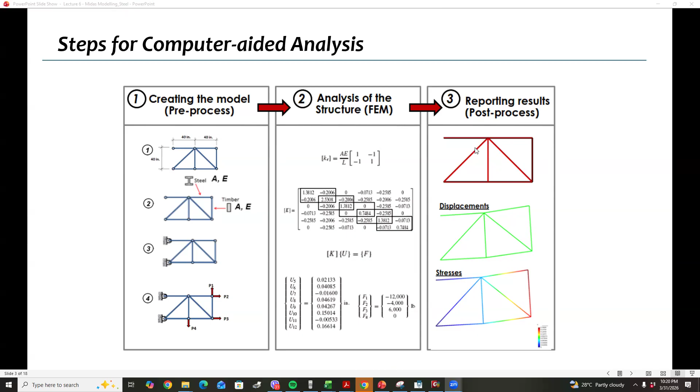For this Midas tutorial, actually I used a reinforced concrete building. However, I already translated it into a steel structure. I went through a few trials in order to convert the building from reinforced concrete into a steel structure. But later on, what we're going to model is a steel structure.

Then we go to analysis, and then these are the post-process - that's the design. Post-processing is the design.

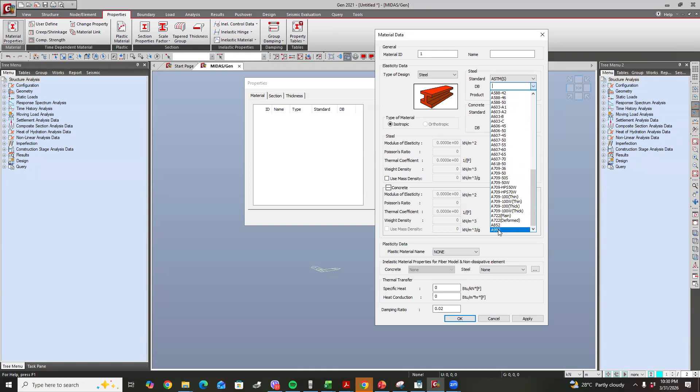Since that's standard, basically our FY is 345 for A992 steel. Click apply, and then we have the steel material. Click OK. So basically this is okay now. I've already added my material.

I will now go to my section to add a section. Basically just click add, and since we're using steel, we go to I section. For the I section, we go to our material.

I will define G1, first C1 - column 1. Let's go here, column 1, column 2. I will define the I section, the column name, let's put C1. Then if you click DB, that means standard.

If you click on this one, you pick your standard. Our standard that we are going to use is AISC 10 - US standard, which is also common in the Philippines. So you just find the standard section that we are going to define. Our standard for wide flange is, based on our assumption, W18 by 76. I'm just going to pick it here, W18 by 76.

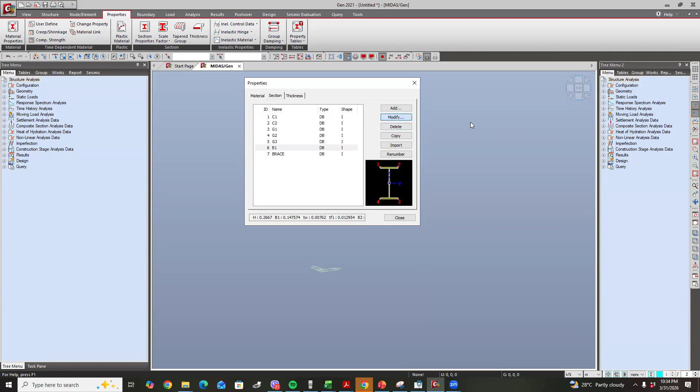So I have now all the sections: C1, C2, G1, G2, G3, and brace. If I'm going to close this - if you want, you could change or modify the section that you've already used. Let's just check: W18 by 76, modify W18 by 71, W12 by 50, W12 by 40, W12 by 53, and of course W10 by 30 and the bracing W10 by 33. Once all the sections are already okay, let's close this.

Then now what we can do is define our frame. We will now define the frame. To define a frame, let's go here to structure. Here in structure we have easy draw frame - basically it automatically draws the frame. But when we say frame, it stands vertically.

So if we click frame, we'll get a frame wizard. With this frame wizard, we could actually draw - we can use this for faster drawing, to draw our floor plan. So let's now draw our floor plan.

We have the 4 meters and then 4.5, repeating 1 through 10, 10 times. For the X dimension, I have 4 meters for the first one, then for the next one I just add the X coordinate. I will now add 4.5, and it will repeat 10 times. So add X coordinate, that's 49 meters.

Now I'm going to define the y-axis. We have here 2.5 meters, so I define 2.5 for the first one, add z coordinate, and then the other one will be 7 meters. So I'm going to define 7 meters and then z coordinate. You could check the nodes below, parang parehas naman nung ating floor plan. Basically, that is correct.

So this is our floor plan. Take note, that is only the nodes. Ibig sabihin, mga points pa lang po yan. So we have to go to edit. We have to generate the frame.

Mag-generate tayo ng frame, and at the same time our angles. Pwede na po tayo mag-generate ng frame. We could choose the material, which is steel material, and then we could choose what section we want to put in our frame, kung ano section po yung gusto nating ilagay. But basically, if you are going to choose, piliin mo yung pinakamadaming section. So the common section here is G1.

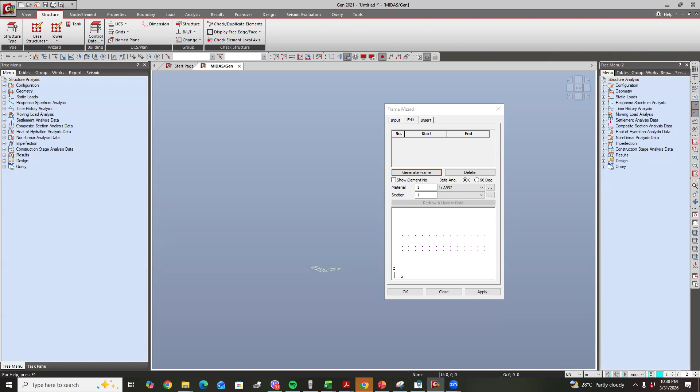Also don't forget to save your project. Basically, it will be easier for me if it will be G1, kasi nga po, that's the most common beam size. Yun yung common beam size. And then, if I want to generate frame, magkakaroon na po ako ng frame dito. Ibig sabihin, magkakaroon na ako ng section or magkakaroon na ako ng elements.

And then, if I want to insert, take note, if the insertion point will be 0, 0, 0, it means this point will be 0, 0, 0. And take note that what we are drawing is a frame, so nakatayo po yan. So, kapag dinrawing natin yung frame, nakatayo yan, like this. But what we want is we want it to be nakahiga, kasi nga, floor plan yung dinrawing natin eh. So that's a floor plan.

So we want to rotate it about the x-axis. Kung magro-rotate tayo about the x-axis, we want to change the alpha to negative 90. If we want to rotate about y-axis, babaguhin natin yung beta. If we want to rotate about z-axis, babaguhin natin yung gamma. So in this case, alpha, beta, gamma, ang gusto ko alpha. Gagawin ko siyang negative 90 para mag-rotate. And then it will now rotate, magro-rotate siya. So click apply.

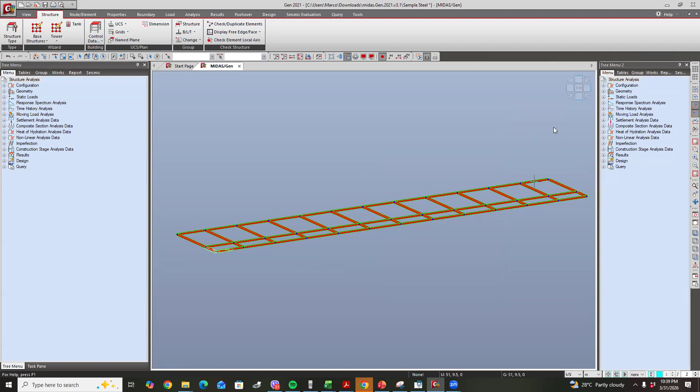So that means naka-rotate na po yung, as you can see, nakahiga na siya. So click top view. Nakahiga na po itong element ko. Nakahiga na yung floor plan natin, which is correct.

So basically, all of the element properties are now G1. Lahat ito G1. But I need to change that. Babaguhin ko po yan kasi only the row A and row B are G1. Etong row C natin, lahat ito G2. And then lahat ng vertical are G3. So I'm going to change the properties.

Baguhin ko yung properties. Para mabago po yung properties, you could go to this toolbar. Sa toolbar, how do we use this toolbar? Basically, if you want to select single, ito, select single. Ito po yung para kang pwede kang mag-select ng isa lang. Tanggalin ko muna yung 3D view para makikita nyo. Pag kinlik natin to, Control H, makikita mo, line lang yan.

Line element. So if we select this one, select like this. Take note, pag nag-select po tayo from left point to the right point, papunta dito, kung ano yung nasa loob ng box, yun yung masiselect. On the other hand, pagka nag-select tayo from down point, pataas, lahat ng dinaanan ng box, lahat ng nag-intersect sa box, masiselect. Ganun yung difference. Again, kapag from top to bottom, kung ano lang yung nasa loob, yun lang yung masiselect. Pero kapag from bottom to top, pataas, lahat ng tinamaan ng box, masiselect. That is using this one, select single.

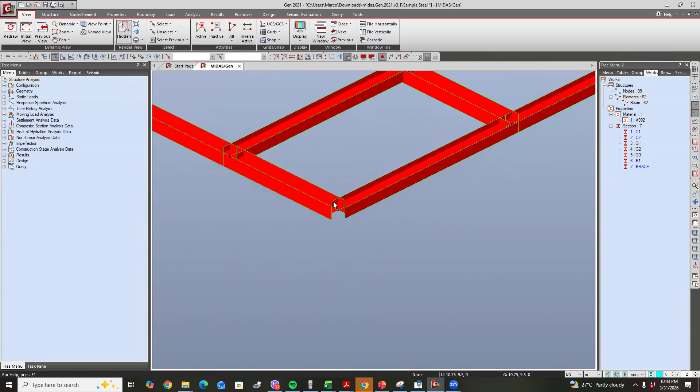Mali yung position ng aking beam, kasi yung beam ko nakahiga, naka-minor axis. Nakahiga yung beam ko. So dahil nakahiga yung beam ko, kailangan ko siyang itayo. Kailangan ko i-rotate yung local axis. So how can I rotate the local axis?

What I can do is to select all of it. Select ko lang, so naka-select na po yan lahat. Ayan, naka-red na. And then what I can do is to rotate. I will go to properties and then go to element and then change parameters.

If you click change parameters, pupunta po siya dito sa element. And then you click element local axis. Sa element local axis, babaguhin natin yung beta angle. Ibig sabihin, ito yung local axis ng ating element. I want to rotate it at 90 degrees.

Babaguhin ko siya, itatayo ko, gagawin ko siya 90. So if I click apply, naka-90 pala to kasi rotate nga pala natin kanina. Kailangan gagawin ko ngayon, gagawin ko siyang 0. Naka-90 degrees to kasi rotate natin siya kanina. So gagawin natin, i-0 natin siya. Yung beta angle naka-0, so click apply.

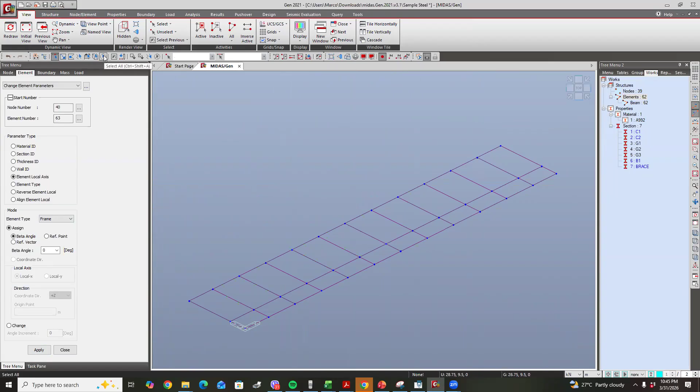Select ko muna lahat, na hindi na yata siya naka-select. So select all. For select all, pwede pala na, again, para shortcut, pwedeng gawin nyo, if you want to select all, pwede pong ito, Control-Shift-A, para ma-select all siya. Pagka naman click mo yung escape, hindi na siya ma-select all. So select all, Control-Shift-A, select all.

And then, we want to change the beta angle into 90 degrees or into 0. So click apply. You could notice na nakatayo na yung beam natin, nakatayo na. So it means tama na po yung orientation ng beam.

And then basically, it's quite confusing kasi lahat sila color red. Lahat sila color red, so dahil color red lahat, hindi mo alam kung tama ba yung na-apply mo na section, kung iba-iba ba yung section nila. So what you can do is that you could select all, Control-Shift-A ulit. Tago ko muna, Control-Shift-A. And then you go to display.

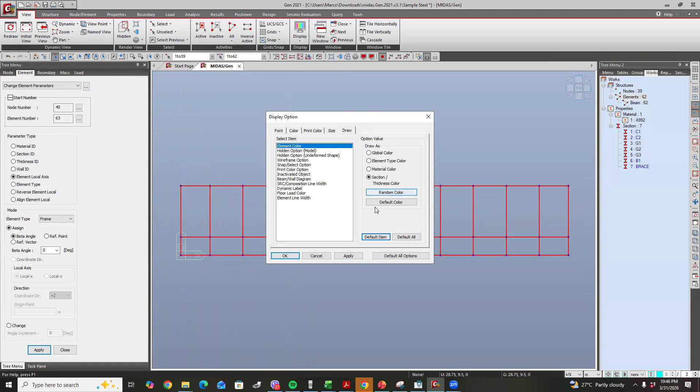Dito sa view, go to display and then display option. Sa display option, you go to draw para po mabago natin, kapag nagbabago siya ng gusto natin, iba yung kulay pag iba yung property. So you click random color and then apply. If you click the hidden property, mapapansin nyo, iba na po yung kulay kapag iba yung property, para mas madali siyang makita.

That means yung color yellow, all of them are the same property. Color orange are the same property, which is correct based on our plan. Color orange is G1.

This one is, the last part is G2. So, para mas madaling makita, at least color-coded siya. Color-coded, no? So, now, what we can do is,

Once we've drawn yung mga girders natin, maglalagay naman ako ng column. So, to draw the column, the easiest thing to do is to select, Control-Shift-A ulit. I-select natin lahat ng node. Kasi lahat po ng point na to, basically are location of the column. Lahat naman ng mga point na yan, location ng column.

So, what I can do is to extrude. Paano po siya i-extrude? Ang gagawin ko, yung node, yung point na to, gagawin ko siyang column. So, to make it a column, I will go to the node element and then you click extrude. Ang mangyayari, yung node natin magiging siyang column. What will happen will look like this, parang ganito.

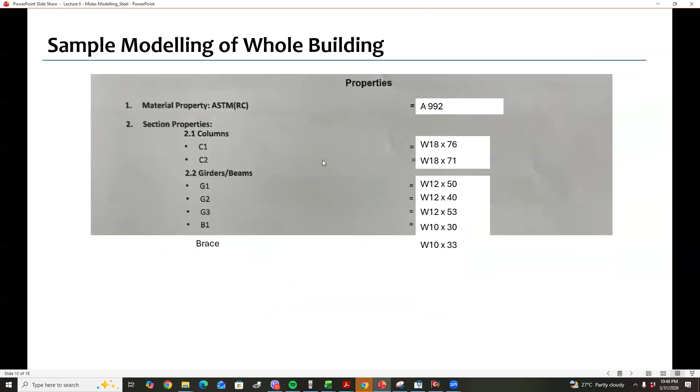So basically, kapag ka nag-start siya ng node, hahatakin mo siya pababa para maging siyang element, para maging siyang column, no? Para maging siyang column. Okay? So, basically, I will click all of this. I-click ko lahat yan, and then I click extrude. Extrude elements from node, gagawin kong line element.

As you can see in the tree menu sa left side. Node, gagawin ko siyang line element. And I want it to be reverse. Bakit gusto ko siyang naka-reverse? Kasi gusto ko, I just want na yung starting node nasa baba, yung top node nasa bottom. Kasi if hindi ko siya ni-reverse, basically, ang mangyayari, this is the start node, this is the bottom node.

So gusto ko lang nakatayo yung local axis. Para nakatayo yung local axis, para mas madali sa design, dapat nakatayo yung local axis. So, what I'm going to do is i-reverse ko siya. Reverse I and J. So, what I'm going to use is A992 and I'm going to use C1.

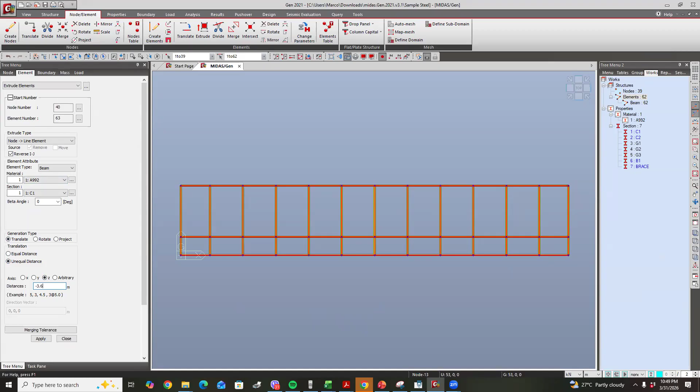And then, I'm going to extrude at an unequal distance. So, maglalagay ako ng distance at Z. At Z, I will add, it will be negative 3.6. Bakit 3.6 meter? Kasi, basically, maglalagay ako ng negative 3.6 kasi nga po, yun yung height ng ating frame or ng column, 3.6 meter. So 3.6, I click apply.

So if I go here, mapapansin nyo, na-extrude na lahat ng column ko, no? Na-extrude na lahat ng column. But, take note, lahat yan C1, which is quite wrong kasi nga, ang gusto natin, etong nasa bottom, sa bottom part, etong part na to, lahat to C2. So if I want to click only this one, etong row A, gusto ko lang makuha tong row A, pwede

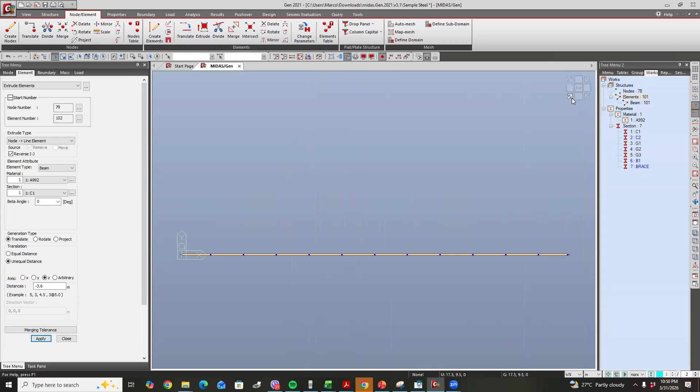ko naman, what I can do is to select only this, select ko lang muna to, yung row na yan, and then I could click to here, activate, no? So if I click F2, pag kinlik ko yung F2 or activate, ang matitira lang po yung sinelect ko. And that selection will be the first row. Sila lang, no? Kasi it will be much easier for me to just select all of this column. Select ko lahat ng column na yan and then apply C2, assign. Napalitan ko na lahat ng C2.

And then, if I click right here, Control A, if I click Control A or this one, this button right here, dito sa top, Control A, babalik na lahat ng column natin or yung previous view natin. So, basically, na-define ko na lahat ng column. At the same time, na-define ko na rin yung lahat ng section. No? Na-define ko na lahat ng section.

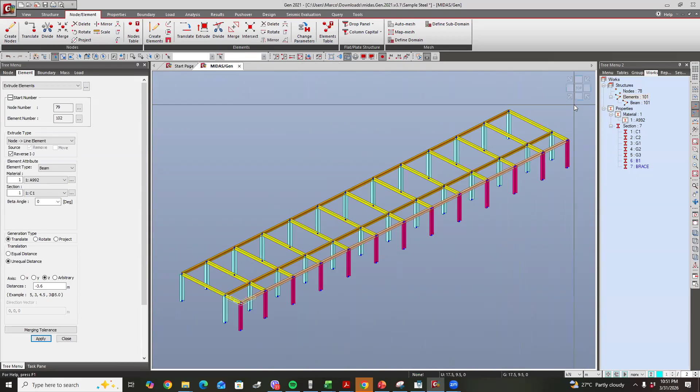So, the next thing to do is that I have here, meron ako ditong sa floor plan, I have here B1. Meron ako ditong B1, no? Meron akong B1. So what I can do is that, ang gagawin ko dito, hatiin ko muna yung B1. So yung B1 natin located at 3.4 meters.

So what I can do is to select this. Select ko yan. As well as this one kasi magkabilaan sila. And then I will have to divide the elements. I-divide ko elements. So click again to the elements dito, node and element, and then divide the elements. If you want to divide the elements at an equal distance, so an equal distance, i-divide natin sila by, anong distance yan? 3.4 meters. Click apply, an equal distance frame. So click apply. So ayan, na-divide na.

Nagkaroon na ako ng node dito. And then I can now draw. Pwede na ako mag-draw ng aking element. I'll just go to create elements and then draw. Yung element natin will be B1, A992. And then I have to just click this. Click ko lang yung node 1 and then node 2. Ayan, para mag-apply po yung B1, no?

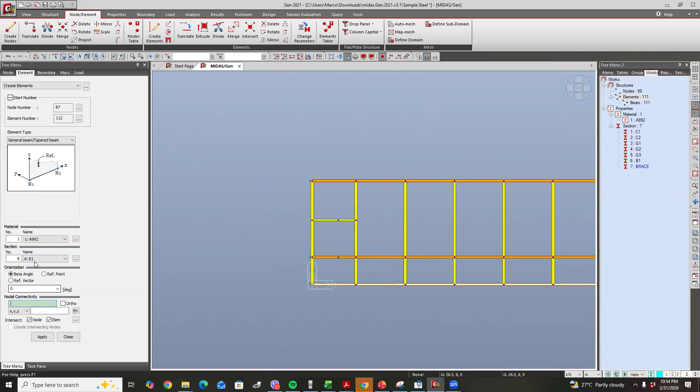So if I already have a node, I can now create the beam. Create elements, then B1. That is correct. B1, and then just create the element going upward. This one, yeah, 3.4. Also this one, you have 3.4. Okay, so our elements are now complete.

So basically, if I already have all the elements, I just want to change the color of these elements. Go to view, then display option, go to draw, and then random color, apply. So the color changes for B1, so I know the application is correct. This is B1.

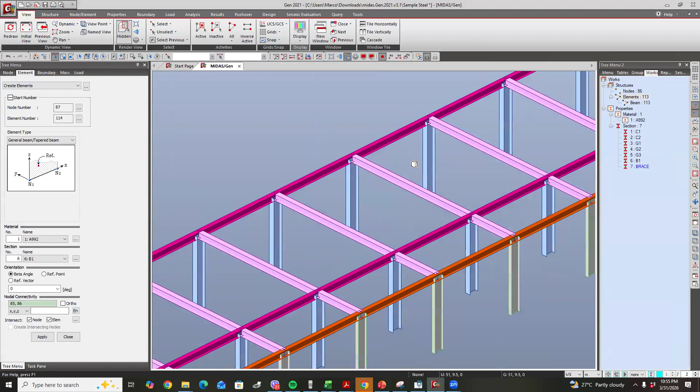Based on my design, I'm going to apply a brace, a bracing. So for me to apply the bracing, maybe I'll apply it later since it's standing here anyway. So I'll apply the bracing later.

What I can do is copy this, since it's already complete for one floor. I'll copy it up to the roof deck since it's the same. To copy up to the roof deck, click top view, select all of this, then generate a copy. We can do this through node and element, or through structure, where you can create a building generation.

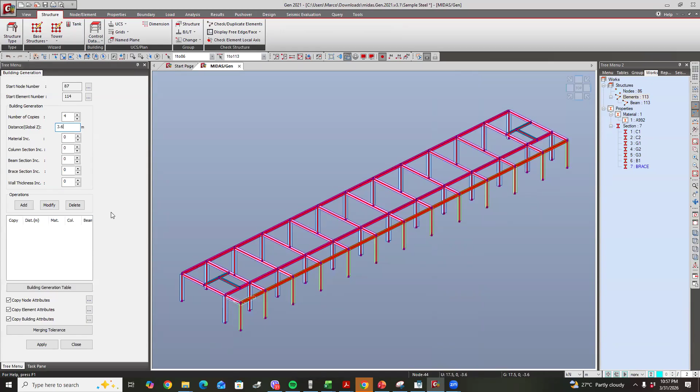In building generation, you can create a copy. How many copies? That will be 1, 2, 3, 4 copies. Not including the original, so this is first, second, third, fourth - 4 copies at a distance of 3.6 meters, global Z. Then just click add, and apply. Basically, this is now our building.

We've copied it upward. Now, if you want to create the story data - but before that, let me apply the bracing first, since we're still using a special moment resisting frame with only beam and column, it will be difficult to design, especially given the size of the building. So for this to be designed, I'll add bracing. Where will I put the bracing?

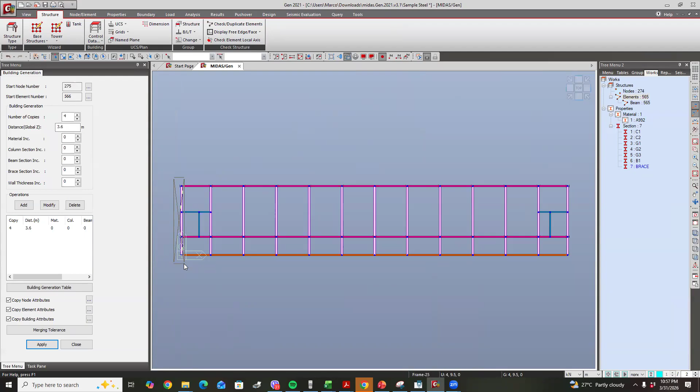So I'm going to input a brace here. I'll place the brace here because our building is quite long, and if I use only a special moment resisting frame, it won't be sufficient. That's why for these frames here, I'll add bracing.

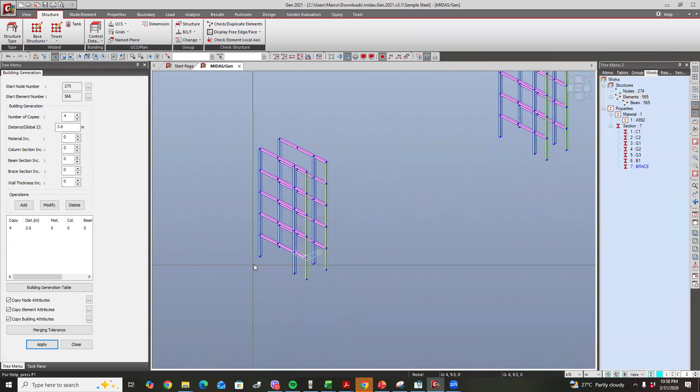Oh, I haven't yet, okay. Let's select all first - top view, all these frames here, on the first row, second floor, here, I'll add bracing to these. Click activate. These frames here, I'll add bracing to.

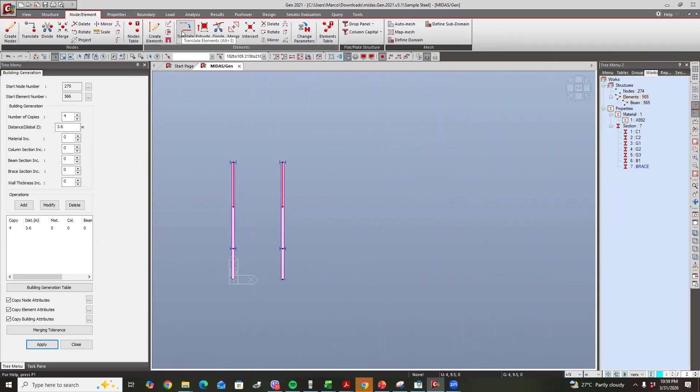Because I'll be placing bracing. So again, to add the bracing, go to properties, divide the element - go to divide, equal distance, 0.1, apply. There, the node is now placed.

At this node, that's where I'll place the bracing. Basically, if I go to the left view, this is where I'll apply the bracing. I'm just going to hide all the others. So what I'll do is select just this one frame - I'll place the bracing here first, then copy it to the left and to the right. So press F2, so this is the only thing I see now.

So I'm going to apply a brace. Create elements, and our bracing will be brace, then create the nodes. My nodes will be this one coming from the bottom, going up to this one.

Dito sa first node, kasi ito yung 3.5 meter, this one. And then, apply din ako ng brace coming from here, going to here.

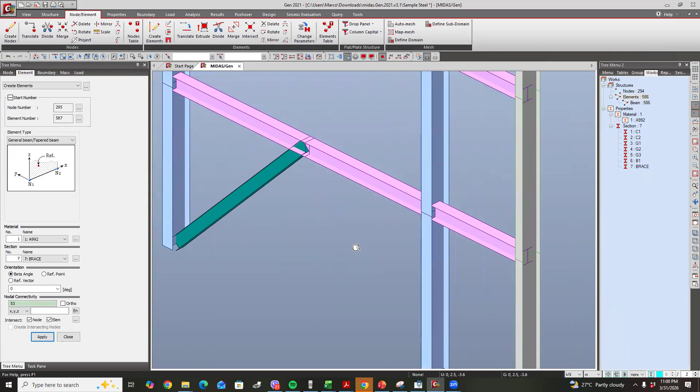Ayan, ito na po yung bracing natin. Sa brace sa baba, usually ganyan po yung itsura niyan. But for the second floor, you're going to connect the brace. So for the second floor, it will look like this.

Tanggalin ko muna yung view para hindi tayo malito. Para ganito siya, ko-connect ko siya dito. Ganun din po dito, create tayo ng brace, kung gusto nating pataas para consistent tayo sa direction ng load, pataas yung pag-assign natin.

So we start here, and then end there. Ganito yung brace natin for the second floor. For the second floor up to the third, fourth, and fifth, ganito na po dapat yung itsura ng brace. Nag-iba lang siya dito sa last floor.

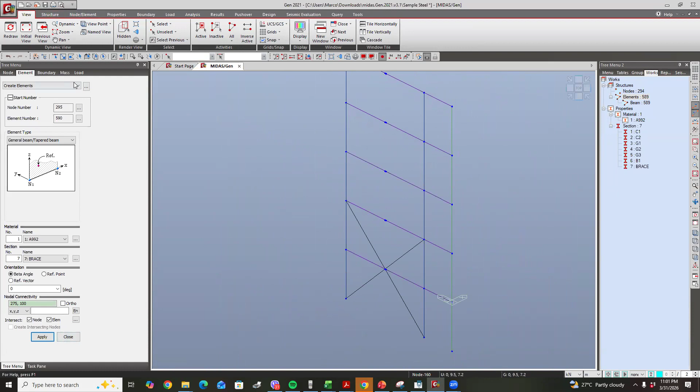So what I can do is I will copy. Ika-copy ko na lang siya, yung brace natin. So how do I copy? I'm going to select, select ko to, and then element, translate elements.

Pag nag-translate elements tayo, I'm just going to copy it at 3.6. So copy, translate, and then at an equal distance along Z, that is actually 3 at 3.6, tatlong beses at 3.6 meters. If I click apply, ayan.

So meron na akong brace, ito po yung itsura ng brace natin. If this is my bracing now, what I could do is I'm going to select all of this. Sa-select ko tong lahat na to, lahat ng brace, select natin yan.

This is now my brace. Yung brace natin, ikakopy ko dun sa second, dun sa susunod na frame. So activate all muna natin, ikakopy ko siya dito sa second frame at a distance of, anong distance nun?

At a distance of 4 meters, ikakopy ko siya at a distance of 4 meters. So copy an equal distance along x, ikakopy ko siya at 4 meters, click apply. Ayan, so basically nakopy na siya dun sa susunod na frame.

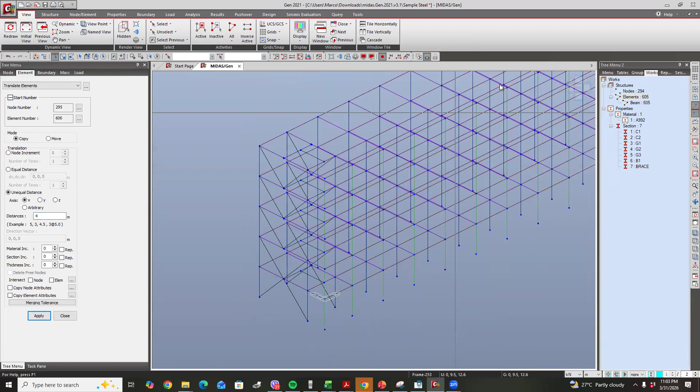And then I'm going to select again. Select ko lang muna tong frame, the first frame, this one, and then F2, I'm going to select my brace. Yung brace lang po yung isa-select ko, select lang muna natin yung bracing.

And then ikakopy ko siya ulit at a distance of, anong distance? 4 meters up to here, I think that's 49, no? 49 meters yan, 49 plus 4, 53. So 49 meters, ikakopy ko siya at a distance of 49 meters and then copy, apply.

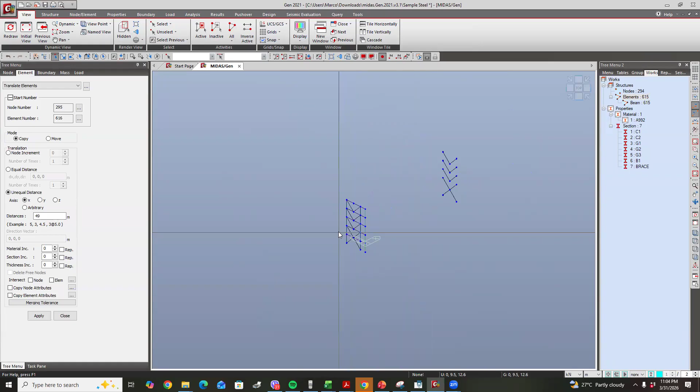So nalagay na po siya doon sa kabila. Tapos I'm also going to add the brace doon sa 53 meters sa dulo. So I'm going to add the brace at a 53 meter distance. 53 and then click apply.

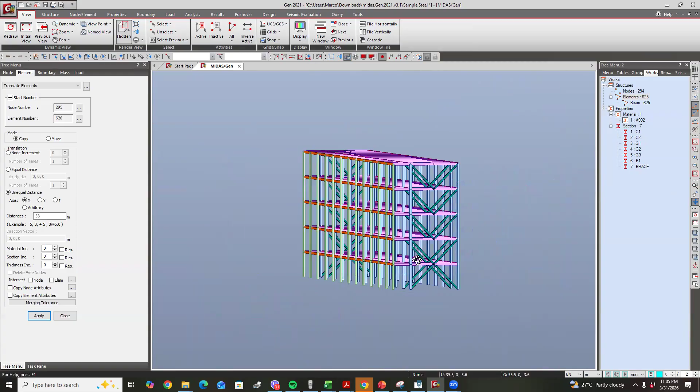So ayan, meron na akong brace doon sa dulo. Basically, if I activate all, meron na akong bracing doon sa dulo, no? So ito pong navigate para po mas madaling mag-rotate. Ayan, so nakikita nyo may bracing na ako. Ito yung itsura ng bracing natin along Y.

Important yung bracing especially when it comes to steel, kasi hindi kaya nung frame element to resist along the Y direction. Dito sa X direction, dahil marami akong frame element dyan, okay lang, okay lang na walang bracing. Pero dito sa Y, dahil wala akong halos na framing, kailangan ko ng bracing para po makapag-resist, para tumayo yung structure ko.

Okay, so meron na akong complete structure, I now have the complete structure. Now maglalagay ako ng story. Bitawan ko na to, so I'm going to add the story. Go to structure, control data, mag-add ako ng story data.

For the story data, if I'm going to auto-generate this one, auto-generate data, you could notice that the first floor is actually at negative 3.6. If you don't want that, for example gusto mo siya na nasa 0, pwede mo naman i-move lahat ng element. You could move all the elements. So for me, gusto ko nasa 0 siya.

So i-move ko lahat ng elements, select all, select all ko muna lahat, Control-Shift-A, and then i-move ko siya pataas. How can I move that upward? Go to node element and then translate.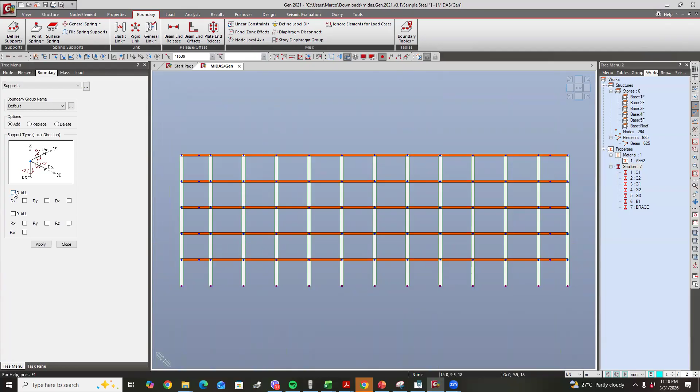So again, paano kung ginawa ko? I'm just going to select all of these nodes, and then go to boundary. Add ako ng support, define support. I want my column to be fixed. If i-fix ko sila, I'm going to click all the rotation to be fixed as well as translation. Click apply, and that's it. Naka-fix na po yan.

So if naka-fix na po lahat yan, then what I'm going to do is create na tayo ng loads. So you go to load tab, plan, ayan, load tab. We create the static load case.

For the static load case, ilalagay lang po natin yung mga common loads natin. So the common loads will be the dead load. Dead load, click here, dead load, add dead load. You also have the live load, LL, click the live load, add. You also have the wind load on the structure.

So that is WX plus, or W plus X. Take note that when you are designing, kapag nag-apply po tayo ng wind load, you have to consider na na-apply mo yung load, yung wind along X, along negative X, along positive Y, along negative Y. Sometimes hindi na nako-consider yung positive X saka negative X kasi regular naman, pero just to be safe, consider na natin.

So consider ko plus X, I will also have negative X, plus Y, and then negative Y. So kumpleto po yan, plus X, minus X, plus Y, negative Y.

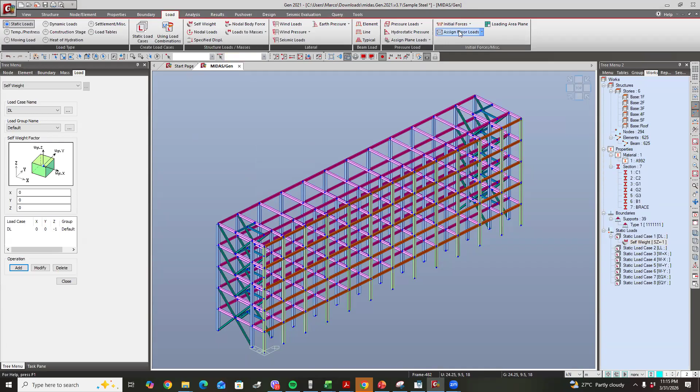So next, we'll now define the dead load. We go again to loads, and then define the floor loads. For the floor loads, the first one I'm going to define is the classroom load. The classroom load is composed of the slab, the topping, the ceiling, and the partition. Let's use a calculator.

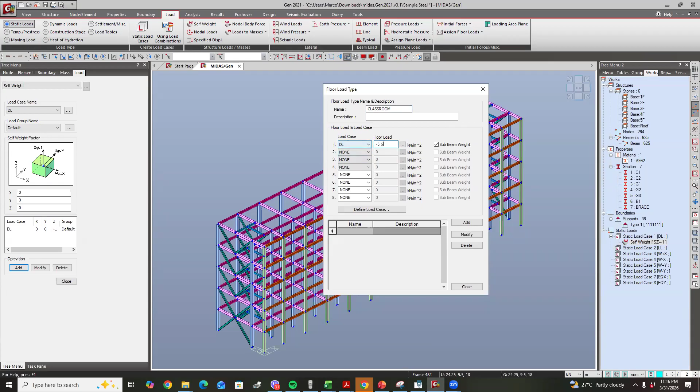So for the total load, that will be equal to 3 plus 1.2 plus 0.24 plus 1.2, which equals 5.64 kilopascal. That is for the classroom. So that means the dead load for the classroom is negative 5.64. I'm also going to apply the live load. The live load in the classroom is 1.9 kilopascal.

So negative 1.9. Basically we're creating a load group here. For the classroom, the dead load is negative 5.64, the live load is negative 1.9. Then you just click add, so now we have the classroom.

And then I'll add the corridor too. For the corridor, it's actually the same dead load, negative 5.64. But the live load is different, it's actually 3.8 kilopascal. So the live load for the corridor is 3.8. Click add.

Next I'm going to define the roof deck. For the roof deck, let's add this. The roof deck load is equal to 3 plus 1.2 plus 0.24, so the dead load is only 4.44. Dead load of negative 4.44 for the roof deck. And then the live load for the roof deck is 1.9, so negative 1.9. Click add.

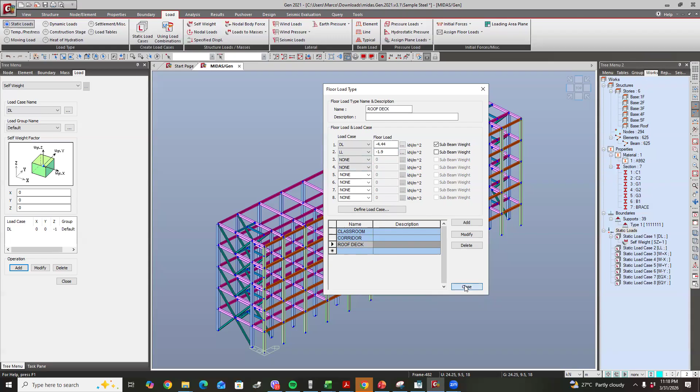Now, if I want to apply the load, I want to apply it first to the second floor. So if I want to choose the second floor, I can click here, activate by identifying, or use Control D, activate by identifying. Then I want to select a story. Go here, story, and click second floor. If you click the second floor, what remains is the second floor.

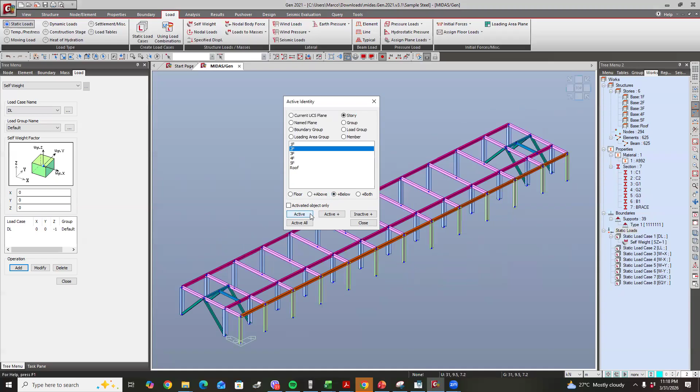So click OK. And for this one, I want to add the classroom. So this is the boundary of the classroom. To add the boundary of the classroom, what we can do is go to the load tab, again load tab, assign floor loads. This time we'll assign floor loads, click assign, assign floor loads, click assign. And then let's start with the classroom.

For this one, we know that the classroom is two-way. You're familiar with two-way or one-way, right? So basically, for it to be two-way, this is what I'll use. For it to be one-way, the S over L ratio should be less than 0.5 to be one-way.

Kapag yung short span over the long span is greater than or equal to 0.5, then that is two-way distribution. Basically, for this one, since lahat po sila, etong lahat na to is greater than 0.5, two-way po yung distribution. So, it will be two-way distribution. That means I'm going to choose two-way and then classroom.

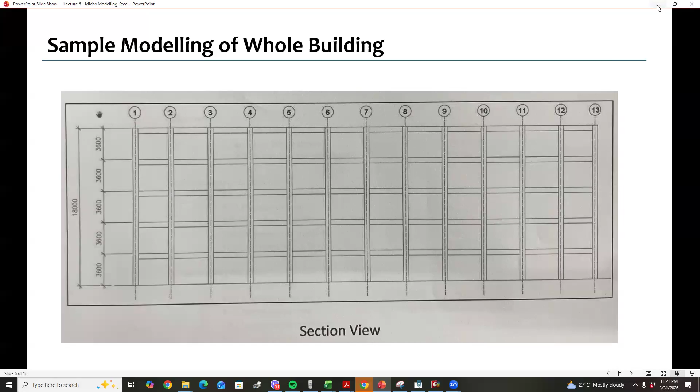So, para mas mabilis, kung pare-parehas naman yung load sa bawat floor, I will just copy the floor load, 3 at 3.6 along Z-axis. Sorry, dito pala dapat yung distance, 3 at 3.6 along Z-axis.

And then, I have to define the loads. Magde-define na ako ng loads. Kiklik ko lang yung nodes na naka-boundary dun sa area. So, boundary the area, this one, this one, this one, this one, and then this, this one, and this one.

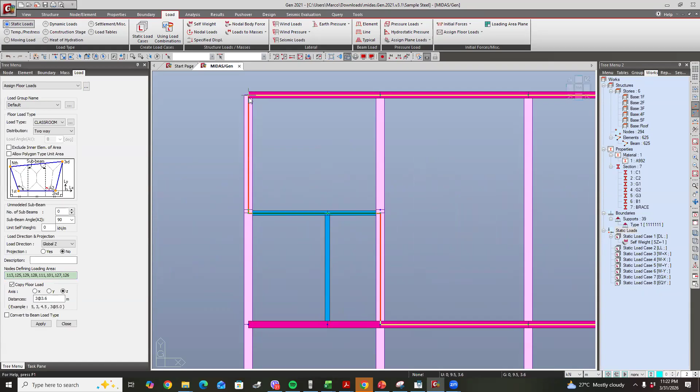Yeah, that's it. Na-apply ko na yung two-way load. Kinlik ko lang yung boundary. So, I'm also going to click the boundary of this one. Ito naman, this is corridor. So, corridor, palitan ko yung classroom, gawin kong corridor.

Nakakopy pa rin siya, nakakopy pa rin at 3.6. So, this is one way, ito po one way ito. Pero ito two way. So, I'm going to start here.

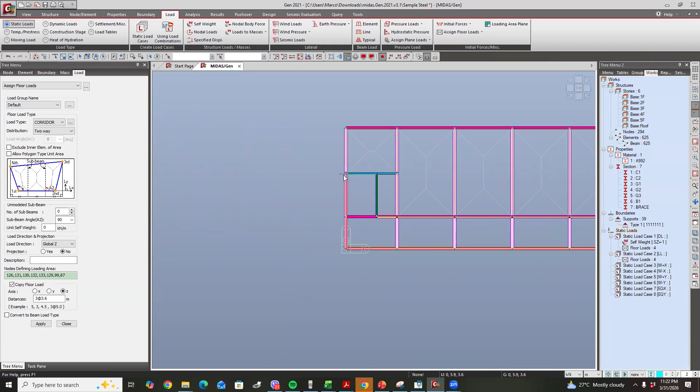Here, this one, tapos punta ako dito, this one, this, and then this, and this. Ayan, two-way na po ito. This is two-way, okay? And then, this small here, actually, stairs lang yan, one-way yan.

So, yung one-way, click ko lang one-way. I'm also going to apply the corridor load. So, one-way, click, click, click, boundary of the one-way, that's it. Then, dun sa kabila naman, one-way din. One-way, one-way, one-way. So, you could notice na na-apply na po yung one-way dito, dito rin. So, apply, close.

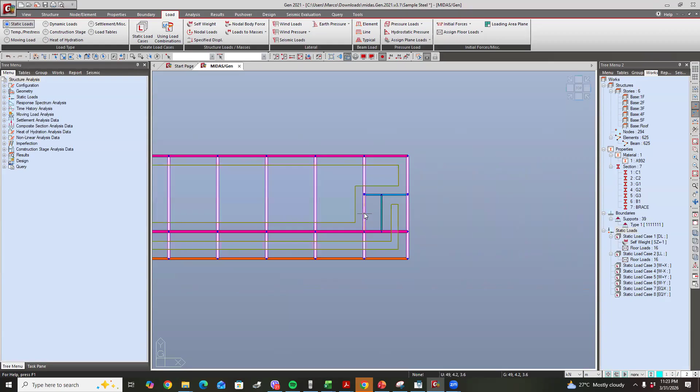If you want to check kung na-apply na po yung load natin, so top view tayo. Tapos click mo yung floor loads, tapos display. So mapapansin mo na-apply na po yung negative 6.8, 12.7, negative 12.7, negative 12.7, tapos meron tayong negative 6.8. Yeah, I think na-apply na, no?

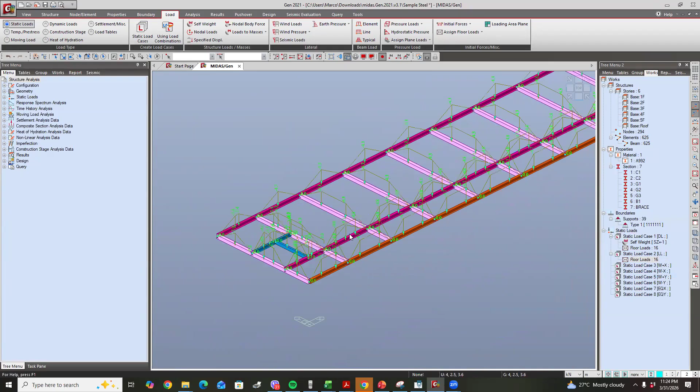Na-apply na natin yung mga loads. So display natin for the static load case, just to check, chine-check ko lang kung na-apply po yung mga loads natin. Okay, may na-apply dito na one way, dito rin, yeah, may naka-apply na one way. So, okay, na-apply na po natin lahat ng loads.

Once we apply all the loads, check muna natin kung na-copy ba lahat ng loads dun sa bawat floor. So, activate all floors o Control A. As you can see, na-apply din po siya hanggang 5th floor. Wala lang yung top, wala lang yung roof deck. So, ngayon, i-click na natin yung roof deck lang.

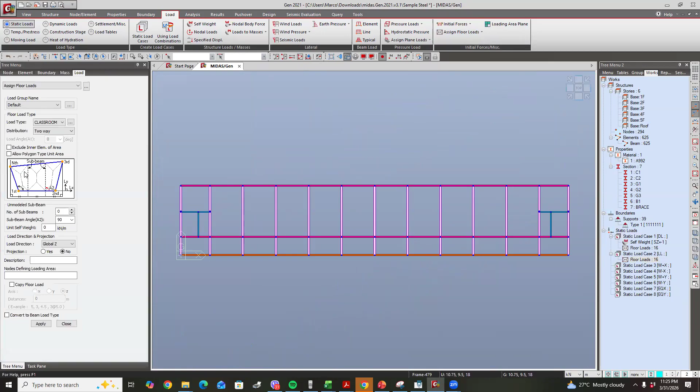So, choosing only the roof deck, activate by identifying that is the roof deck, which is story, roof, floor, active. So, roof deck na lang po ito, this is now the roof deck. Ngayon, pipiliin ko po, basically, ilalagay ko yung roof. Ga-assign tayo ng roof deck. And then, hindi ko na kailangan mag-copy.

I'm just going to define the loading area, this one. Again, these are two-way, so two-way po ito. This one, this, ulitin ko.

Select all the floors for two-way, dahil equal naman po yung loadings natin dito sa roof. Ito na lang yung pinipili ko, no? Iniwasan ko yung one-way kasi para tama. So, and then I'm just going to apply the two-way here.

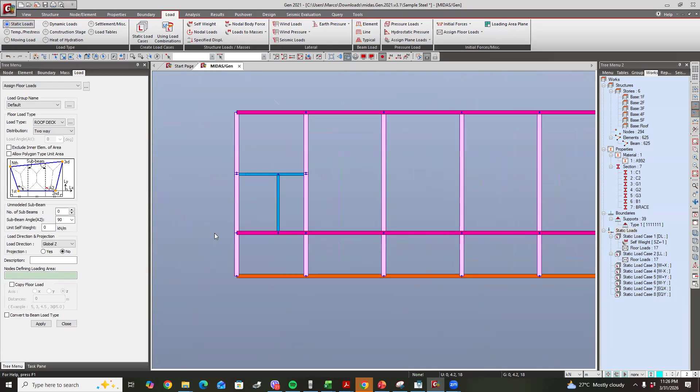Two-way dito, saka two-way pa rin ito. So, two-way, yeah, two-way. And then, dun din po sa kabila, two-way. And then, also one-way para sa dito. So, one-way. Then, dun sa kabila, one-way din. Yeah, that's it. So, na-apply na po natin yung loads natin.

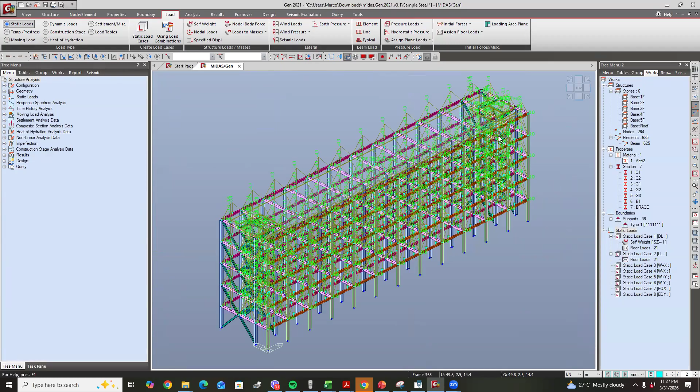So, you click close and then activate all. So, basically, yan, naka-apply na po lahat ng loads. Naka-apply na lahat ng gravity loads. So, after applying for the gravity loads,

we can now create the load to masses. Dahil na-apply ko na lahat ng gravity load, gagawin ko po siyang mass load. Ano yung mass load? Ito po yung gagamitin natin sa earthquake. Basically, kung maalala nyo yung earthquake, meron tayong tinatawag na seismic dead load. Sa seismic dead load, ang ginagamit lang po doon, dead load plus 25% of the live load. Yung live load na yon para sa storage area. Kapag ka meron kang mga elevator, kapag may storage, so you add 25% of the live load.

Pero this time, you click load to masses. Kapag wala ka namang storage area, then dead load lang. Load to masses, ang gagawin po natin, piliin natin XY, and then nodal load, beam load, floor load, pressure.

Before ko pala gawin to, may nakalimutan yata akong loadings. I think meron pa akong wall load na hindi ko pa nalalagay. So maglalagay pa ako ng wall load, click to top view.

To add the wall load, ilalagay ko siya sa second floor, third floor, fourth floor, saka fifth floor. Wala na sa roof deck, hanggang fifth floor lang. So i-select ko lang, activate by identifying story - second floor, third floor, fourth floor, fifth floor, walang roof deck. So floor lang, this one.

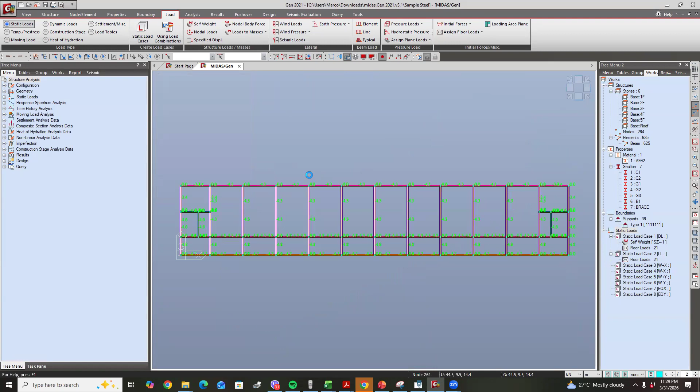And then i-apply ko yung wall load dito sa beam. Tanggalin ko muna 'to. Dito ko lang siya i-apply sa boundary, sa perimeter beams. Select ko na yung perimeter beams - this as well as this, ito din, and then ito. Kung titingnan ko, na-select ko na lahat ng nasa baba, that is my perimeter beam.

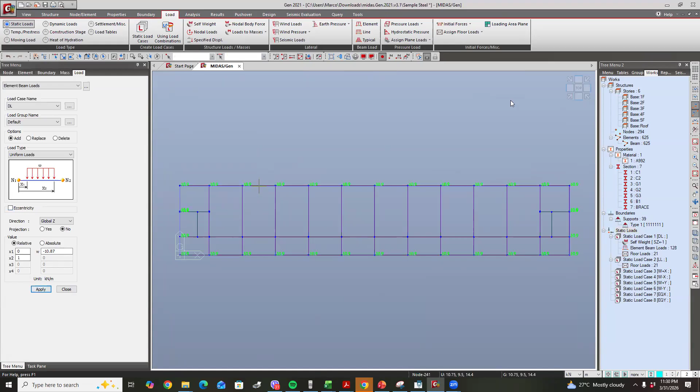So mag-apply ako ng wall load. Ang wall load natin is 10.87 kilonewton per meter. Click load, then element load - uniform load ito. Isasama ko siya sa dead load, and then global Z. And then the uniform load will be negative 10.87, based on the calculated wall load. Based on the apply, na-click na natin lahat. Click apply. Ayan, na-apply na lahat ng wall load, uniform load po yan.

So Control A na tayo. So this is now all the wall loads. Punta ako sa view kung gusto niyong makita yung rendered view. So now, kanina andun tayo sa load.

I'm going to convert now my loads to masses. Sa loads to masses, click XY - dapat po mass direction is XY. And then the dead load, maglalagay lang tayo dead load. Again, kung tall building yung dinedesign mo, medyo mataas, maglalagay ka ng 25% live load kapag may mga storage area. But since wala naman tayong storage area, this is just a classroom, dead load lang po i-consider ko. So mag-add ako ng dead load, add, and then click OK. Meron na tayong masses, that is now my masses.

Kung meron na po akong masses, mag-apply na po ako ng wind loads. So load, go to wind load, add the wind load. Sa wind load natin meron tayong apat - plus x, minus x, plus y, saka minus y. Ibig sabihin lang po ng plus x, going along x, going negative x, going plus y, positive y, going negative y. So plus x muna.

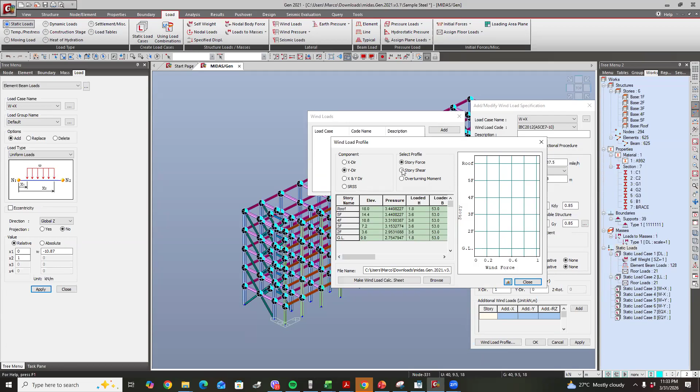So wind load profile, if I click the wind load profile, ito na po yung wind load natin. If I click the y direction, dapat wala siyang load kasi x direction lang tayo naka-apply. And then, if you want to check the calculation sheet, click mo lang ito - ito po yung calculation sheet, yung mga nilalagay natin sa report. Click close. Kung okay na po yan, click apply. Ayun, wind load x.

We could also define wind load minus x naman. So load case minus x.

This time, the direction I'll make -1. You put -1, click apply. And then for plus y naman, 0 yung x direction, plus 1 si y direction. Click apply. For -y, it will be -1 naman si y direction. Click apply. So ayan, meron na tayong 4 na wind load.

And then close na natin to, and then close. If you want to modify, kung gusto mo i-check, modify ka lang po. Ayan, -1, tama naman. Plus y, that is plus 1, and then -1. Okay? And then click close.

Next thing to do, pwede na po tayong maglagay ng seismic load. For the seismic load, you go to seismic loads. Mag-add tayo ng load case, add load case. For the load case, it will be EQX. Mag-apply tayo ng earthquake load along X. Ang gagamitin nating seismic load code, UBC 1997, ito po yung basically yung natutunan nyo sa earthquake.

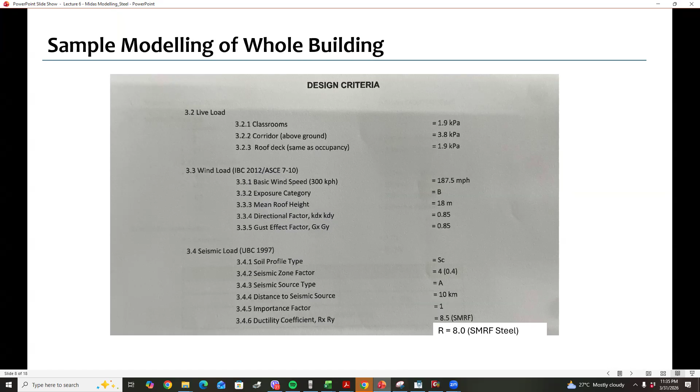Soil profile type, SC. Gagamitin ko soil profile is SC. Tapos yung zone factor, 0.4. Seismic source type will be type A. Usually kapag dito sa Manila or malapit sa Pasig City, nasa Quezon City, seismic source type A yan kasi malapit sa West Valley Fault. Distance is 10 kilometer. You could determine the distance using hazard hunter. Importance factor is 1.

So ngayon, I could now calculate the period. For the period calculator, take note, meron tayong 3 types, 1, 2, and 3. So paano malalaman kung ano dyan? Balikan natin yung code. Basically sa code, kapag sa period, the first one is steel moment resisting frame, yan yung number 1. Yung number 2, it will be reinforced concrete and eccentrically braced frame. For number 3, it's all other buildings.

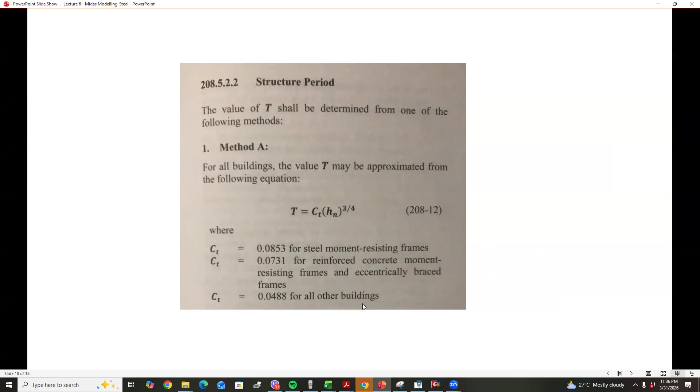In my case, yung aking x direction, the x direction is actually steel moment resisting frame. Kasi yung bracing ko naka-apply lang sa y direction. So yung bracing natin, y lang. Yung x natin, special moment resisting frame. So, sa x direction, special moment resisting frame siya, pero sa y direction, bracing. So, number 3. Pwedeng magkaiba po yan. So, click OK.

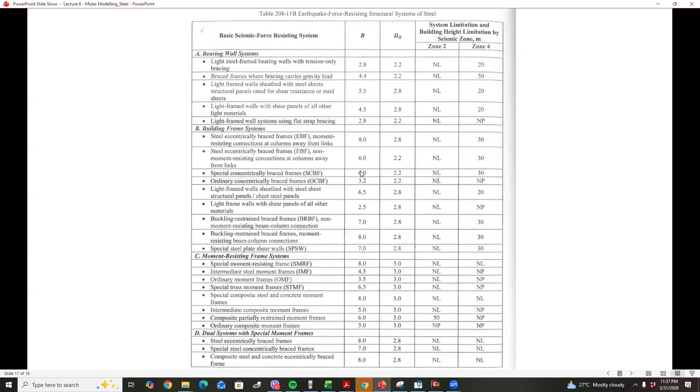0.74 saka 0.426. And then, the ductility coefficient R. Take note, for the x direction, it's actually special moment resisting frame kasi yung bracing ko nilagay ko lang sa y. So, yung R ko, it will be 8.0 for x kasi special moment resisting frame yon. Yung sa y naman, it will be 6. Bakit 6? Balikan natin to. Kapag special moment resisting frame, yung R natin 8. Pero kapag building frame system, special concentrically braced frame, ito po yung ginawa ko, 6.0. So yung R natin 6 for Y. X ko is 8.

Factor will be the seismic factor, if this is EQX, so yung X direction ko is 1, ang Y direction ko 0. Wala akong eccentricity. I'm just going to click apply. So tama na to lahat, click apply. Or if you want to check seismic load profile pala, ito po yung earthquake natin. Sa Y direction, walang load, sa X lang meron. So click apply, so meron na akong EQX.

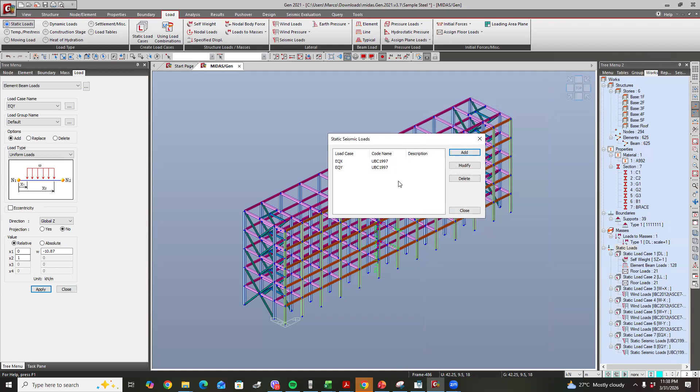And then click EQY. Ngayon, tanggalin ko yung X direction, lagay ko naman yung Y direction which is 1. So click apply. So meron na akong EQX saka EQY. Close. Meron na akong earthquake load. Close.

Ngayon, mag-apply na tayo ng dynamic load. So we apply the dynamic loading. So for the dynamic loading, instead na static load tayo, mag-apply tayo ng response spectrum. Response spectrum is basically the earthquake load in the dynamic effect. Nakukonsider natin yung vibration kapag sa dynamic loads.

So we click dynamic, mag-apply tayo ng response spectrum function, RS function. For the RS function, mag-add tayo ng function, add function. Yung function natin nakadepende sa design spectrum, which is UBC 1997. And then we just apply all the properties here.

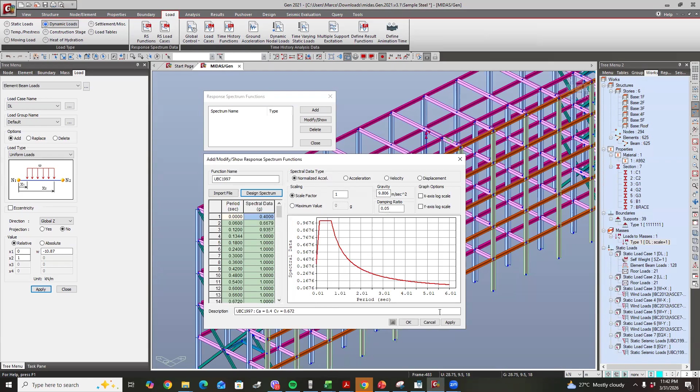The soil profile is SC based on our criteria. Zone is 0.4. Seismic source A, distance is A, distance to seismic source is 10. So okay na to. Click OK. This is our design spectrum, UBC 1997. And then we click apply and then close na natin. So we have now the UBC 1997 spectrum. And then we click close.

Close na natin yan. Maggagawa naman tayo ng load cases, RS load cases. For the RS load cases, gagawa ako ng RS major, which is the direction is X and Y. I will click auto search angle and then it's on the major axis. Apply siya sa along X. Ang scale factor natin will be 1/R. Dahil yung major axis natin, ang R ko dito 8.0, ang lalagay ko dito 1/8. Bakit siya 8.0? Kasi special moment resisting frame. At saka ang function na gagamitan UBC 1997.

And then we just scroll down and add this. Again, 1/8 po ito. Add. Ito na, that is our RS major.

And then baguhin natin to, gawin natin RS ortho. But this time, yung scale factor natin, 1/6, kasi 6 lang po yung sa Y. So wala nang babaguhin, add.

Hindi siya na-add. So UBC 1997, 1/6, that is ortho. Palitan ko pala yung pangalan, hindi pala nabago. Kaya ayaw. RS ortho, ibig sabihin 90 degrees. Click apply, add.

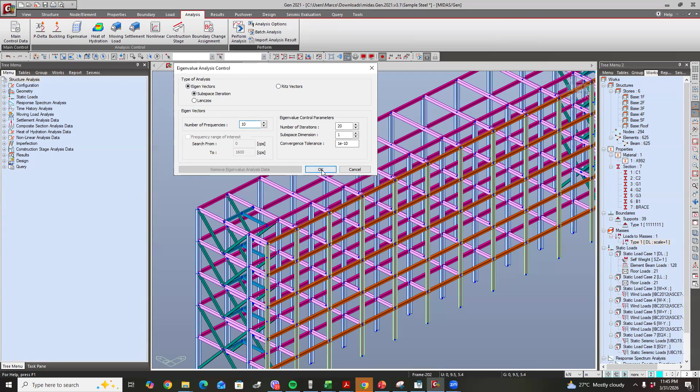So pwedeng subspace iteration, pwede rin pong Ritz. Pero dapat increase mo yung number of frequency, it should be 10. Increase to a number of 10. Subspace iteration, click OK.

So again, ulitin natin, eigenvalue subspace iteration, dapat po at least 10 yan. Click OK. And then after that, pwede na tayo mag-perform analysis. Click perform analysis, magra-run na po yung model. So now the finite element analysis solver is solving the equation.

So once it stopped, okay na. So check natin yung command window, yung message window. Again, pag nawawala po yung mga tree menu, pwede mo i-click, left click, message window. So okay na, wala namang error. So kung walang error, basically pwede ko nang ma-check yung result.

Pwede na ako mag-result ng mode shape. So kung i-check ko yung vibration mode shape, sa result, mode shape, vibration mode shape, ito na po yung mode 1. If I apply, ang vibration niya for mode 1 is along X. Ito, nag-vibrate siya along X. Kung titingnan ko yung...

Titingin ako sa front view, nagba-vibrate siya along X. That is the first mode, which is okay.

Paano ko po nalaman na okay? Kasi kapag ang nangyari, yung unang vibration mo bigla yang umikot or nag-rotate, hindi maganda yung pagkaka-design or hindi maganda yung pagkaka-place ng elements. So ngayon, yung mode 2, dapat ganun din.

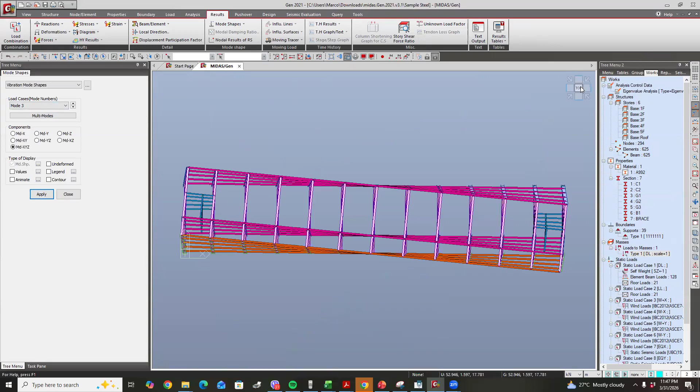So usually, kapag po meron tayong drift, ayan. So sa drift, punta tayo sa result, tapos results table, story, click natin yung story drift. I-check natin yung story drift.

So sa story drift, ang i-check natin, EQX, EQY, RS major, RS ortho. Ito yung mga i-check natin. Yung static sa dynamic. Click OK.

So ibig sabihin, ang gagamitin ko na amplification, yung mas malaki, which is 8, 0.7 times 8, kasi mas malaki yung R na 8 compared sa 6. So what I'm going to use is 0.7 times 8.

And then the importance factor is 1. Allowable drift is 0.02, kasi if we go back here, kapag daw yung period natin is exceeding 0.7, the calculated story drift shall not exceed 0.02.

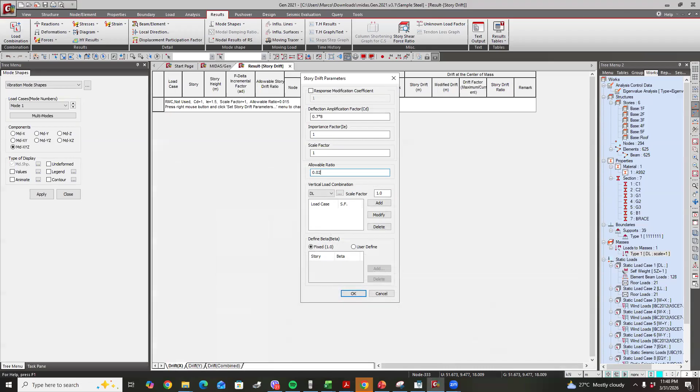So yung period natin greater than 0.7 yan. So the allowable drift is 0.02. Click OK. So mapapansin nyo, lahat po ng ating drift is actually okay. Ibig sabihin, okay po yung design, hindi siya nag-exceed sa allowable drift.

Kapag may nag-NG dito, ibig sabihin not good, you have to revise the elements or kailangan mo pang magdagdag ng elements, kasi ibig sabihin hindi siya okay. So in this case, dahil po okay lahat, ito po yung nilalagay natin sa report. Pwede mo na itong ilagay na ibig sabihin, yung drift mo, okay siya. Okay yung check natin sa drift.

Again, the deflection amplification factor depends on this. So here, 0.7 of R. The R I used is 8 because it's larger compared to 6, to get more amplification. So I used 8. But the drift we solved is still okay.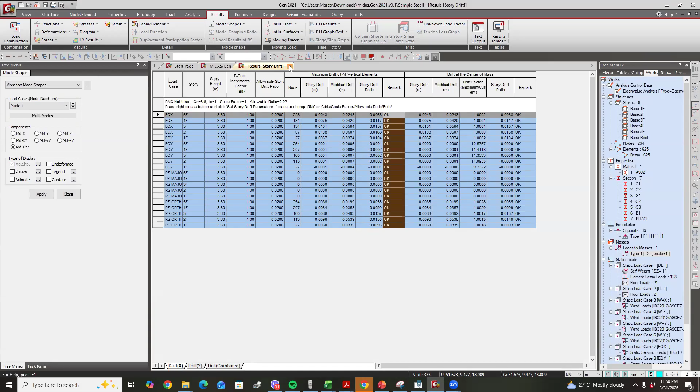So let me close this. I'll go back to our model. Now that our drift is okay, we could now scale. We will make load cases. Let's scale the response spectrum.

How do we scale a response spectrum? We go to the results table. I'll get the story shear for response spectrum analysis. Let's get RS major and RS ortho. If you notice, this is in scientific format.

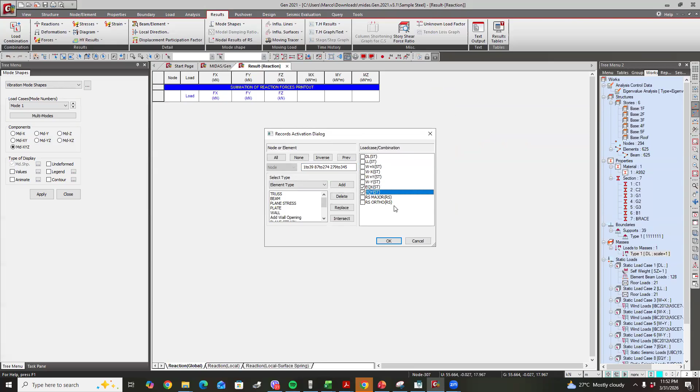2116.819, 2097.692. Now I'll get EQX and EQY, Earthquake X and Earthquake Y. To get those, I'll first remove the story shear table, close it, then go to results table, reaction. I'll get the reaction for EQX and EQY, click OK. If I sum all the reactions, here it is.

This is FX. Our EQX is, as you can see below, 2349.383269. For EQY, it's 3475.595566. So now I can get the scale factor.

The scale factor for EQX along X will be, let's divide EQX by RSX. And likewise the scale factor for EQY along Y will be EQY over RSY. Let's format these factors to 2 decimal places.

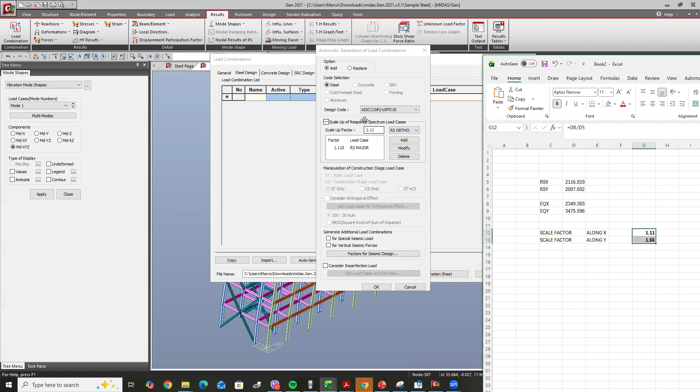For the major direction, the scale up factor is what we calculated. Scale up factor for RSX is 1.11, add it for RS major. And for RS minor or RS ortho, what we calculated is 1.66, add it as well.

After that, we auto-generate. Take note that after this, you click this negative sign so that the factors 1.11 and 1.66 appear. So, we are going to consider special seismic load.

We'll consider special seismic load and vertical seismic force. For the vertical seismic force, our value is 0.5 Ca I D, so the vertical load factor is 0.5 CaI.

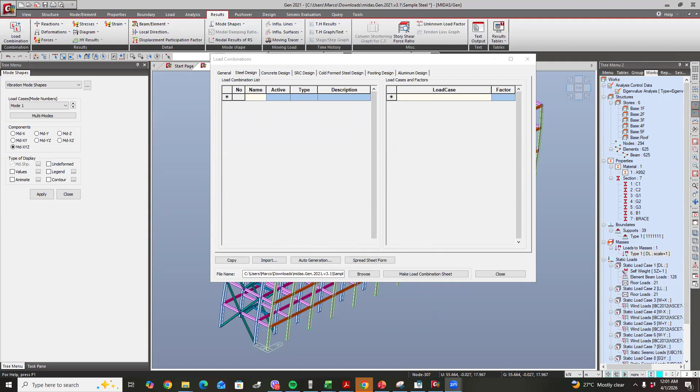Okay, let's repeat how to create the load cases. Then go to auto generation. And again, our design code is LRFD, since it doesn't consider NSCP. So we use LRFD.

Let's add load cases, RS major. What is our RS major? The scale factor is 1.11, then click add. RS ortho is 1.66, same as before, then add.

And then we are going to consider special seismic load. AISC LRFD 16, so we use LRFD. Then click the vertical special seismic load, and then click OK.

There, we now have the load combination. This is now our load combination. If it's okay, click close, and close the load combo.

For the load combination, we can now go back to the results. We can now see the dead load, live load moment. Let me just remove the deflection.

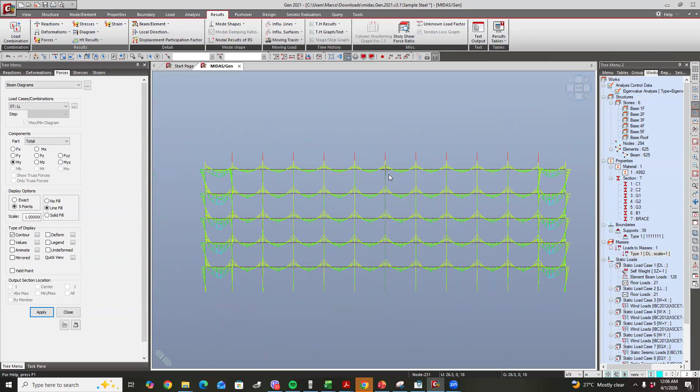For live load, on the other hand, apply the moment like this, which is correct again. This is the moment diagram. These are the ones you can put in your report for your design project.

Wind along X, here it is. You also have wind along Y. You could explore what else you can show here. I know you would like to explore the software. So, EQY, EQX, and so on.

After this you could get different deformation shapes here that you can show in your report. So you could get the deformation shape for EQX. You can also show the RS major. This is RS ortho.

EQX, EQY. This is EQX, and then EQY. And then if I want to determine, anyway, you could explore what diagrams you can show. You could plot the diagram, define the diagram, and so on.

Next, I'm going to go to the design process. I'll go to design and then steel design. Let me check my design code. The design code is AISC LRFD 16.

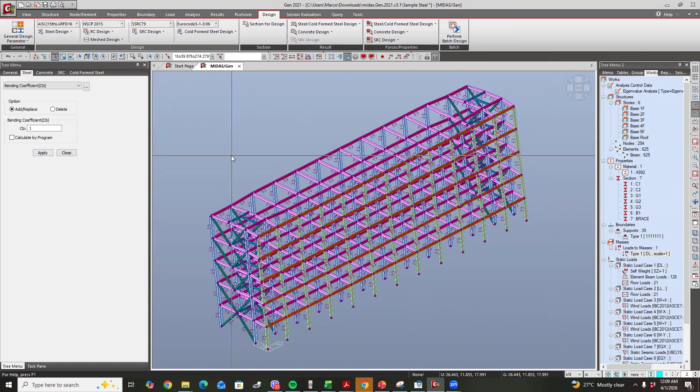Basically, click all. Or control, you could do control shift A, and then click apply. Basically the program will calculate the CB for you.

And then you could calculate for the seismic load resisting by member. So for the seismic load resisting by member, what do we use? Buckling, or the special concentrically braced frame.

So I'll select my bracing members. If I want to check this one, I select the bracing. I click this brace, then select. There, I've selected the bracing, then apply. That's for the bracing.

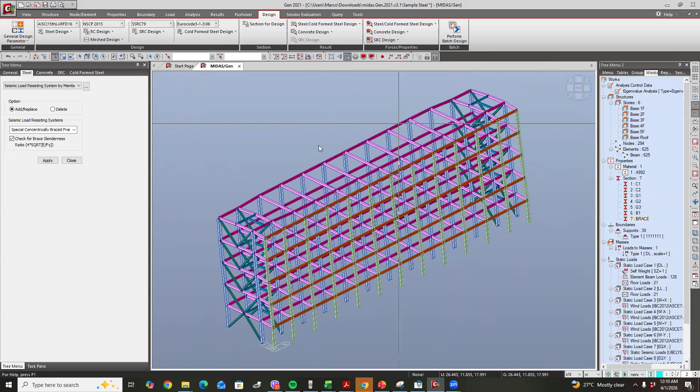And then I also want to assign my members. I want it to be the same member assignment. What does that mean? It means the members that are cut up, I want them to be considered as one member. So go to member assignment.

You click automatic, allow single element member, then all, then apply, so that the member gets considered properly. Okay, and then after that, you go now to the design.

Go to design, perform batch design, and then go to steel code checking, since we're using steel. And then click run. Let's wait a little while as the code runs.

So, okay, natapos na pong i-run yung code. Once na-run yung code, as you can see, all of the members actually pass. So pasado na po ito.

So I have here C1, C2, G1, G2, G3, B1, brace. Yung mga DC ratio nila: for C1, 0.65; for C2, 0.513; for G1, 0.528; for G2, 0.55; for G3, 0.366; B1, 0.37337; brace is 0.976.

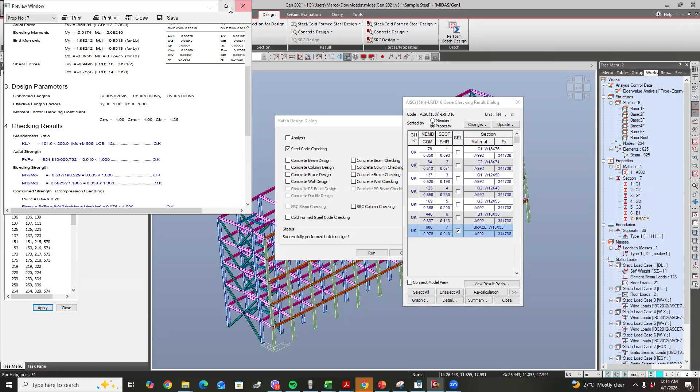Pero sa brace natin, I think na-maximize natin yung member. The strength is 0.94. Okay? So ang critical po dito, naging yung deflection. So basically, pasado naman pa lahat ng member.

So the question is, sir, paano kapag hindi pasado? Pwede mo pong baguhin yung section. Pupunta ka dito sa change. Basically, let's say bumagsak yung C1, punta ka dito sa change, tapos maghahanap ka ng satisfied section. Search satisfied section. Magbibigay siya sa'yo ng iba't ibang section na pasado, like this one, na pwede mong palitan.

So pwede mo daw palitan ng W10 by 68, W14, W21. Basically, ginawa ko na to before, I even model this. Ginawa ko na pinalit-palitan sila. But basically, ito po yung maximize na or pinakamaliit na section na nakuha ko given para pumasa sila ng deflection.

Para pasado ng deflection. So again, click. Kung gusto mong baguhin yung section, click mo yan, tapos change, tapos you search for satisfied section coming from the combined ratio of 0.8 to 1, satisfied section. Kapag nag-search ka po ng satisfied section, it will give you different load combinations.

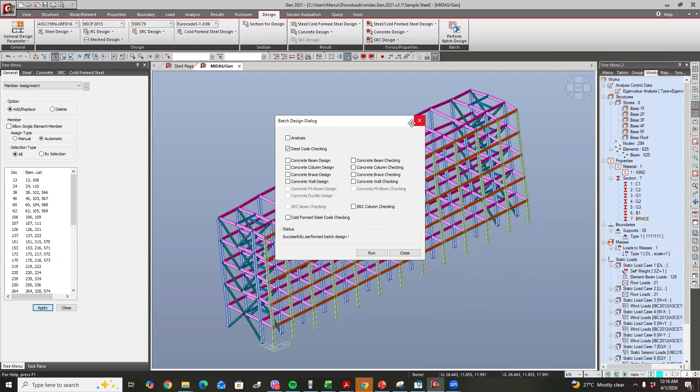So again, that's how you design the steel building. There's still a lot to explore in this software. Marami ka pa pong pwedeng matutunan dyan. I'm just giving you a basic introduction on how to use the software, pero you could still explore by yourself. What I'm giving is the minimum. So you could still explore, pwede mong bagu-baguhin kung paano mo pa mapapaganda yung design. It depends on you, and at the same time, what you are doing is a different project naman, so meron kang ibang building na dine-design. So that will be all. Thank you.

So anyway, when I was checking the model, please check that the deformed shape, dapat kapag ka-chinek mo yung RS ortho, RS major, dapat along X siya. Along X, katulad nito, along X. Tapos yung RS ortho along Y. Para ibig sabihin, tama yung ginawa natin.

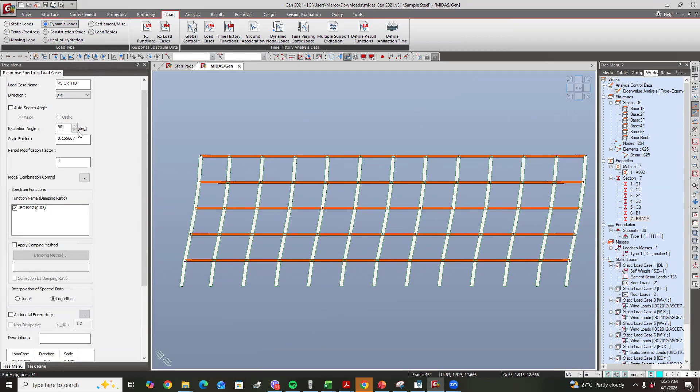So dapat yung RS ortho along Y, yung RS major along X. Para maging ganito yan, ang ginawa ko, dun sa load combination, sa response spectrum load cases, dapat nakaganito po to. Sa RS major, dapat 0 yung angle. Sa RS ortho naman, dapat 90 yung angle. Okay? Hinabol ko lang kasi baka later on, ang mangyari, yung major niyo nasa y-axis, yung minor nasa x-axis. Pwede kasing magkaiba, no? So para hindi po kayo malito, gawin niyo na lang excitation angle 0 saka 90.